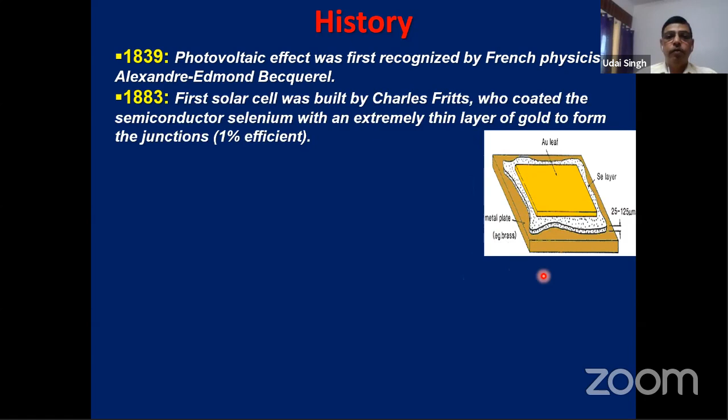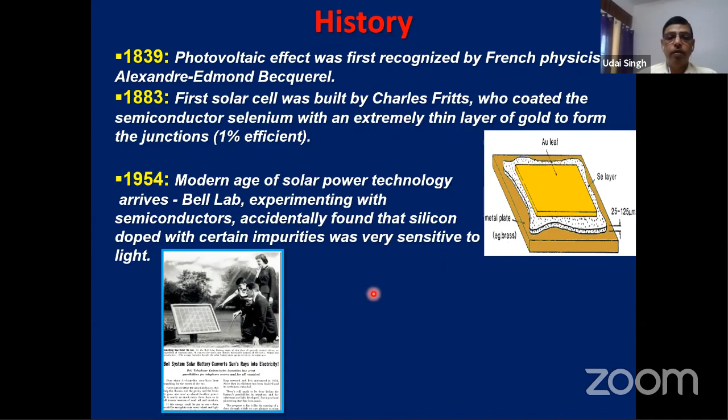In a brief history, in 1839 the photovoltaic effect was discovered by Becquerel. In 1883, the first solar cell was built, which was basically a selenium layer with gold leaf plated on top, giving an efficiency of around 1%. But the breakthrough came in 1954, the modern age of solar power technology, at Bell Labs. They showed that silicon doped with certain impurities was very sensitive to light. From there, silicon photovoltaics came into the picture.

So if you see the importance: direct conversion of solar radiation into electricity, no mechanical or moving parts, no noise, no pollution, and PV modules have a very long lifetime. Generally, the manufacturer gives around 25 to 30 years of lifetime for these modules, with a certain reduction in the efficiency.

The energy source, the sun, is free and inexhaustible. It's a very flexible energy source. You can use it in microwatt devices like your calculators, and megawatt plants are also installed.

So if somebody wants to make solar cells, what are the requirements? What do you look for in the materials? Semiconductor materials which generally have a band gap between 1.1 eV and 1.7 eV, because that takes care of the available solar spectrum. One needs a direct band gap structure for higher energy conversion, but silicon is an indirect band gap material, and still it is dominant in this field.

An easy, reproducible deposition technique suitable for large area production. If you are trying to go for this, it should be an easy and reproducible deposition technique, how you are going to make this, and then good photovoltaic conversion efficiency. One also looks for long-term stability. Otherwise, if the stability is not there, it's very difficult for people to go and buy it.

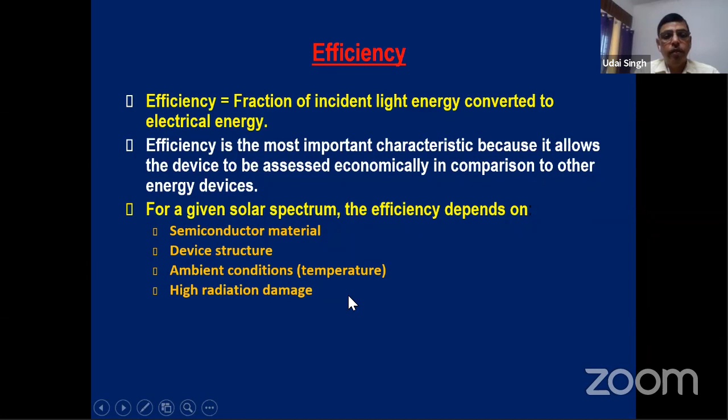Then the ambient conditions, under which conditions you are working. Then high radiation damage, if you are using the solar cell in space applications, so radiation damage is also a concern. And then the sun spectrum you are getting. Like in European countries, you don't get sunlight throughout the year.

So efficiency alone is not enough. The cost of the cells is also important, and the lifetime. So three parameters: efficiency, cost of the cell, and the lifetime, that is the stability.

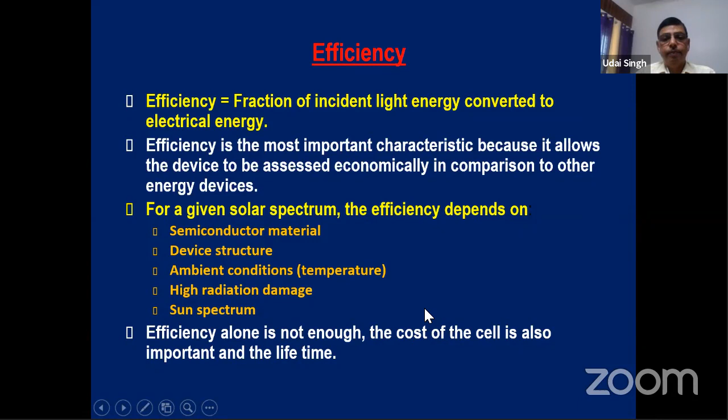If you look at the different approaches, there are many approaches to make PV cells, and experts do not agree on which one is best. If I work on silicon, I will say silicon is best. If somebody works on thin film, they say thin film is best and it's coming. And then there is concentrated photovoltaics. I will not be discussing this.

Our focus will be mostly on thin film, which comprises amorphous silicon. Then you have the polycrystalline materials, and there is a lot of work going on in organics, and recently a lot of work has been on perovskites.

So if you see the overview, the first generation was single crystal silicon wafers, and still silicon is dominant. More than 90% you are still getting from silicon. In the second generation came amorphous silicon, then polycrystalline silicon, then cadmium telluride solar cells, and then copper indium gallium diselenide solar cells.

In the third generation, one gets the nanocrystal solar cells, quantum dot cells, polymer solar cells, dye-sensitized solar cells, and the perovskites. They belong to the third generation. And now the fourth generation is hybrid inorganic crystals with a polymer matrix, and also tandems. People are going for tandem solar cells so they can capture the maximum solar spectrum. Because if you have a fixed band gap, you will only get that range of the solar spectrum. If you have a variable band gap, you can capture most of the solar spectrum in your device.

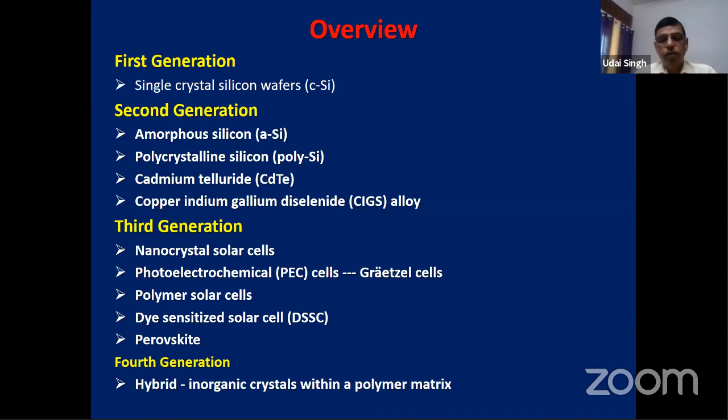So, as I told, I will just go briefly through silicon solar cells. Cells are typically made with crystalline silicon wafers, and these wafers are obtained from large cylindrical monocrystalline ingots. These ingots are grown by the Czochralski growth process, and directional solidification or casting produces large-grained polycrystalline ingots. If you go for polycrystalline, it reduces cost by around 40%, but the efficiency becomes less. So ingots can be either single crystal, monocrystalline, or multicrystalline. The most common approach is to process discrete cells on wafers sawn from the same. You saw it into different thicknesses.

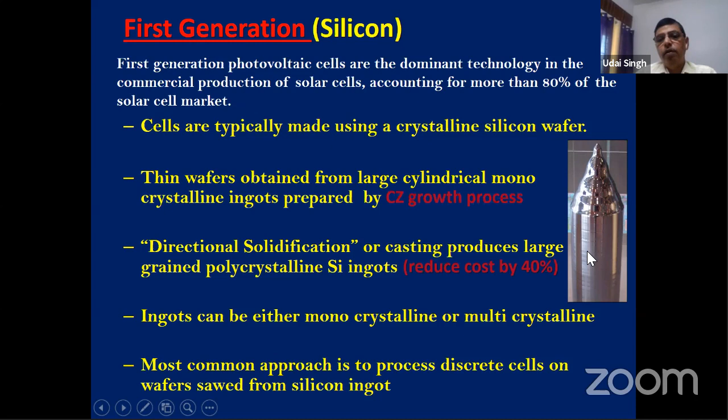So in brief, you start from the silicon feedstock, then you melt it in the Czochralski crystal pulling process. Then you get a big ingot, more than 6 or 7 feet. From there, you cut slices of wafers, you process them, and then you get a solar cell, and basically a solar module. In silicon, you have different silicon cells, and then you integrate them. Okay.

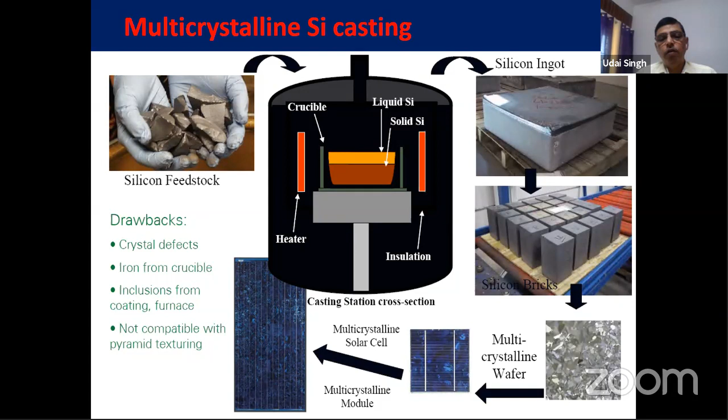Similarly, with polycrystalline, the material you grow will look different, like this. It's not a single crystal. Then you can have a polycrystalline module. This process is slightly cheaper, but efficiency is slightly reduced. So this is basically a brief on how silicon solar cells are processed, which you always see on rooftops; even on government buildings now, people are putting solar cells.

So why is crystalline silicon so successful? Because it has high module efficiency, around 20%. It has high stability and reliability. It's a mature and modular technology; it has been researched a lot. If you want to set up a plant, you can buy a ready-made plant and start production within 6 months. No environmental concern, and widely available material. This silicon you get from sand.

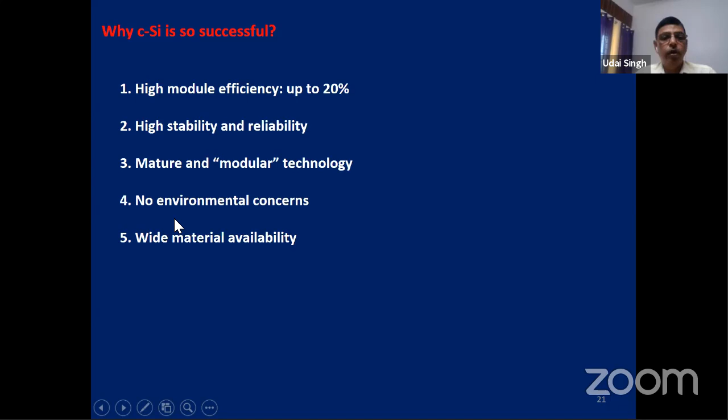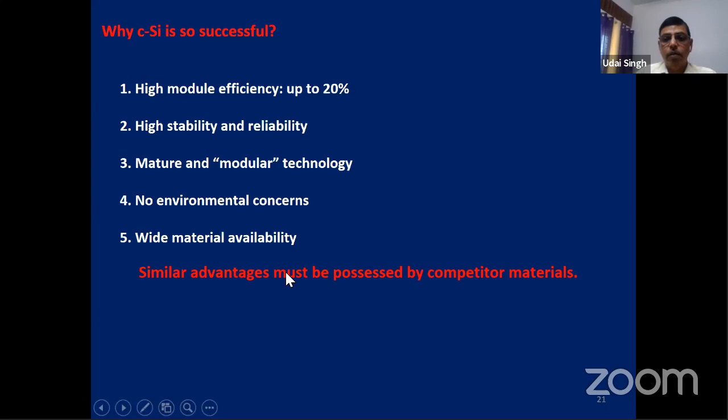So when you are looking for some other material, you have to look for similar advantages. Otherwise, it's not going to be as successful. The only weak point for silicon was that it is an indirect band gap, so the light absorption coefficient is slightly low, and the cost. But in the last 1 or 2 years, the cost has come down drastically.

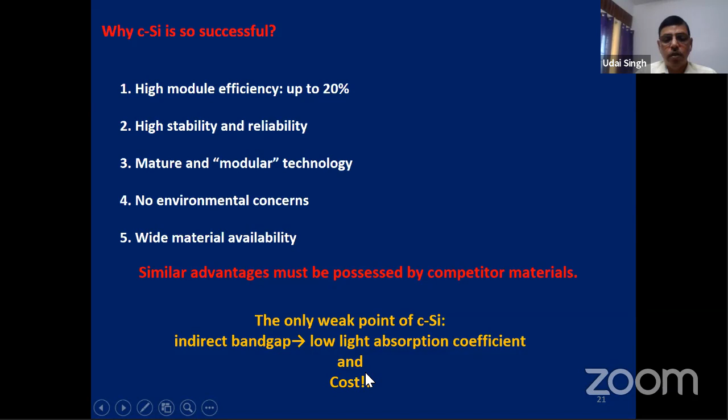So as I told, I will be discussing thin film. What are the advantages of thin film? If I go for thin film, it has to compete with the established crystalline silicon technology. One has to achieve comparable performance with the promise of substantially lower cost; only then can it compete with silicon. High production capacity with reduced material consumption and energy input in the fabrication process. Lower module cost for large area terrestrial applications.

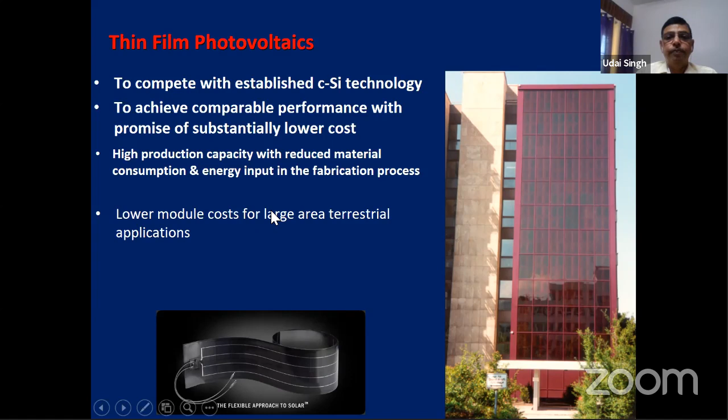Some of the advantages: in silicon, you have seen, layers of more than 100 micron are still needed, but for the thin film you need 1 micron to 5 micron thickness only. So low material cost is there. Continuous large area manufacturing is also possible. In silicon, you have different wafers and then you try to integrate the wafers in a module, but here you can have a continuous large area deposition.

And cell interconnects you can produce monolithically within the module. Flexible and lightweight modules can also be made. And these thin film modules are aesthetically superior, which gives the advantage for building-integrated applications. You can get it coated on the window panel also. Applicability in roll-to-roll production is also possible, and it has a potential in tandem applications.

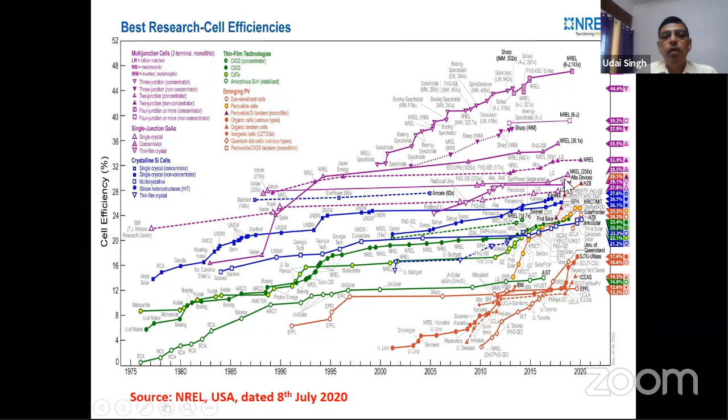This is from NREL, the National Renewable Energy Lab of USA; they update the highest efficiency of different solar cells. We are concentrating on the thin film photovoltaics. If you see CIGS, copper indium gallium selenide, at lab scale the maximum efficiency achieved is around 23.4%. Cadmium telluride is around 22.1%. Copper zinc tin selenide has reached a maximum of around 12.6%, so people are still working on that to get enhanced efficiency.

In the meantime, perovskite has come. Perovskite, you can see, is 25.2% on a small area. And if you are using tandem, meaning you grow perovskite on silicon, the efficiency increases to 29.1%. So on perovskite and CZTS people are still working.

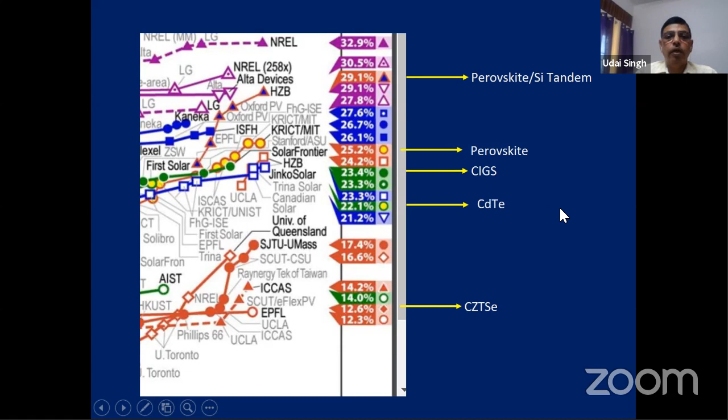As shown earlier, crystalline silicon needs more than 100 micron, whereas thin film needs only 1 to 5 micron. The main thin film technologies were amorphous silicon, which is now almost dead; no company is working on it now. Cadmium telluride, only First Solar is working on that. And then CIGS; I will show you the different companies working on copper indium gallium selenide.

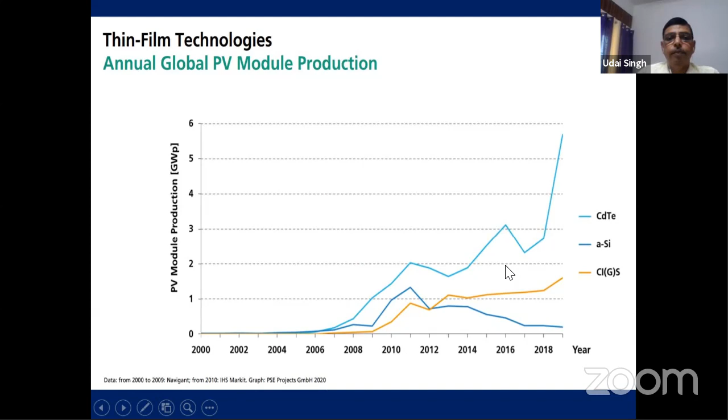In the annual global PV production, cadmium telluride is rising. CIGS is slow moving, but amorphous silicon is going down, so maybe by 2021, 2022 nobody is going to make amorphous silicon. Cadmium telluride and copper indium gallium selenide modules have the potential to reach cost-effective PV electricity, and they have transitioned from laboratory to the marketplace. The transition from lab to manufacturing has been much more difficult than anticipated.

Copper indium gallium selenide. Now there are different ways to manufacture this copper indium gallium diselenide. If you do it by sputtering, the highest achieved is 16.7. If you go by the co-evaporation method, recently it has been updated to 23.4, which is the highest.

Copper indium gallium selenide is a p-type material, so you have to make a PN junction. For the N side, mostly cadmium sulfide is used for making the PN junction. Because cadmium is slightly carcinogenic and toxic, Japanese people don't use cadmium, so it is cadmium free. Here also one has achieved 22%.

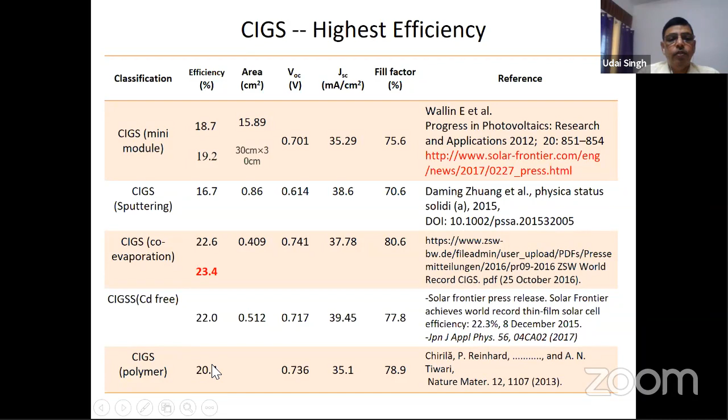You can also grow this on the polyimide substrate, a polymer. At lab scale, the highest efficiency achieved is 20.4. The module was 19.2, by Solar Frontier. If we compare with crystalline silicon, from 75 onward it is around more than 20%, small area. But CIGS started in 76 or 77, and now it has gone to more than 23%.

There are different process steps. Within this region, 95 to 2012-13, people were using the 3-stage process. I will discuss that. After that, people are trying to use alkali metal and then post-deposition treatment. So now this is the standard process, which is giving more than 22% efficiency at lab scale.

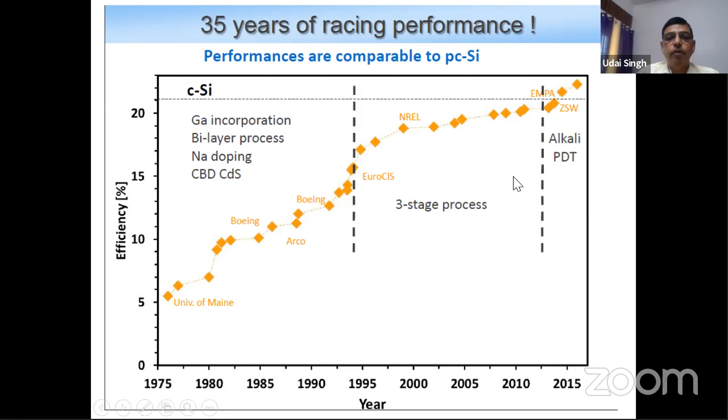So what is this material? It is basically copper indium diselenide. If you replace some of the indium by gallium, it becomes copper indium gallium selenide, so you can vary the band gap of the material. It's a compound semiconductor of group I, III and VI. It's a heterojunction. Silicon is a homojunction, because you take a p-type silicon wafer and diffuse n-type. But here copper indium gallium selenide is p-type, then you have a different n-type material, so the p-n junction is a heterojunction.

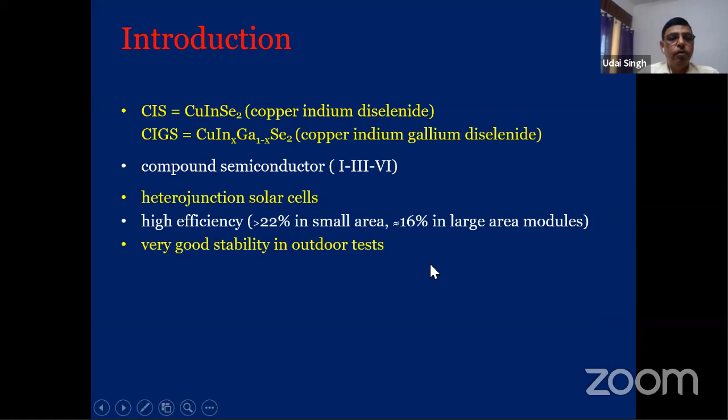High efficiency, more than 22% small area and 16% large area module. Very good stability in outdoor tests. For applications, you can use it in solar power plants, power supply in aerospace, and decentralized power supply.

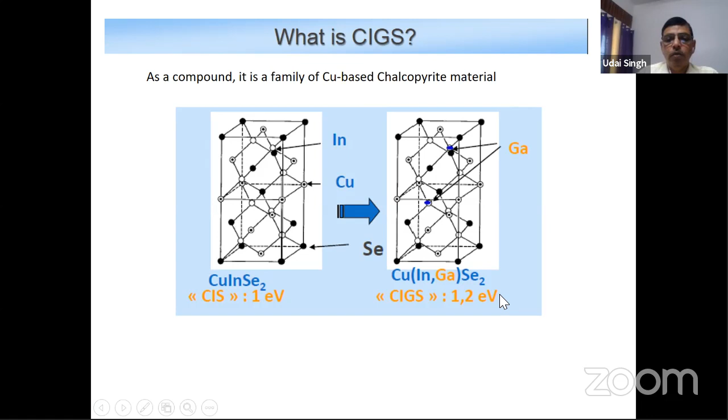The structure is basically the copper-based chalcopyrite material: copper, indium and selenide. If you replace some of the indium by gallium, you get copper indium gallium selenide. This is 1 electron volt, but you can go more than 1 electron volt. You can also replace selenium by sulfur to increase the band gap, but other problems come in. The best efficiency was achieved at around 1.2 electron volt.

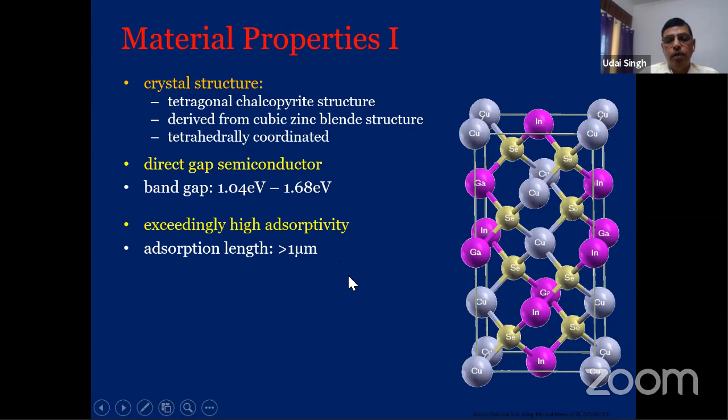The crystal structure is the chalcopyrite structure, derived from the cubic zinc blende structure, which is tetrahedrally coordinated. It's a direct band gap semiconductor. The band gap can vary from 1.04 to 1.68 electron volt by replacing indium by gallium. Copper gallium selenide is around 1.68; copper indium selenide is 1.04. The absorption coefficient is very high, so you can absorb most of the spectrum within 1 micron thickness.

The minority carrier lifetime is several nanoseconds. It's important because as soon as you generate a charge carrier, it has to be collected, so it depends on the carrier lifetime and the diffusion length of the charge carriers.

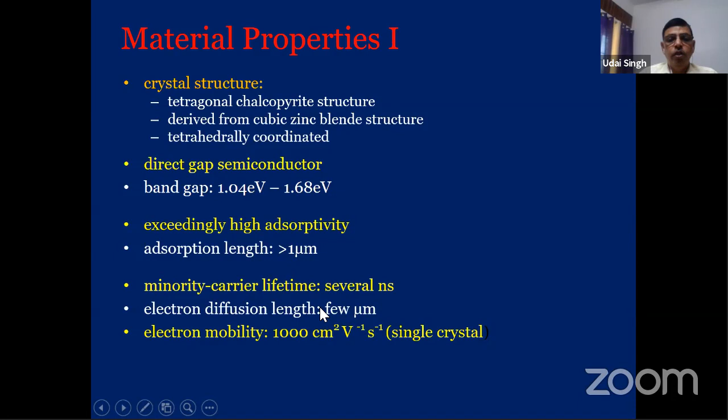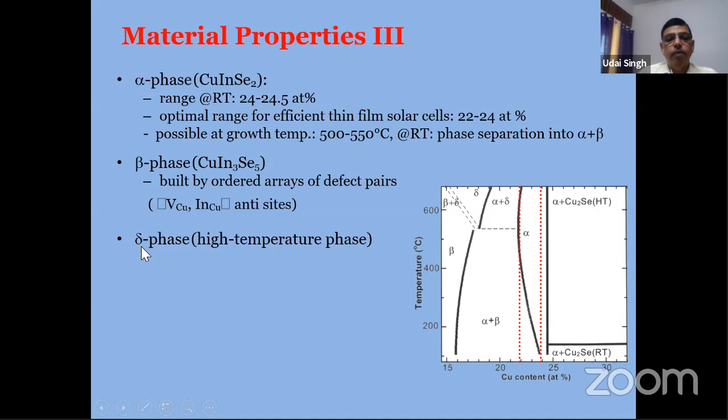Otherwise, you get the beta phase, certain vacancies, copper vacancies, indium replacing the copper, which is antisites. You get the delta phase also built by disordering copper indium. So these will create all the defect states into this. Now, if you are more than 25, you get the copper selenide phase, which is basically highly conducting material.

So the problem is that the alpha phase is highly narrowed at room temperature. So people have tried to see how we can increase this range. Partial replacement of indium by gallium has increased that range. In this case also, you can only replace 20-30% of indium. If you replace more of the indium by gallium, you are going to increase the band gap, but there are

certain defects again introduced. And people have also shown that sodium, around 0.1 atomic percent, if you put it into this, will also slightly increase this range. It will give a better morphology, passivation of grain boundaries. It will have a higher p-type conductivity and reduce defect concentration. I'm not going into detail how this works.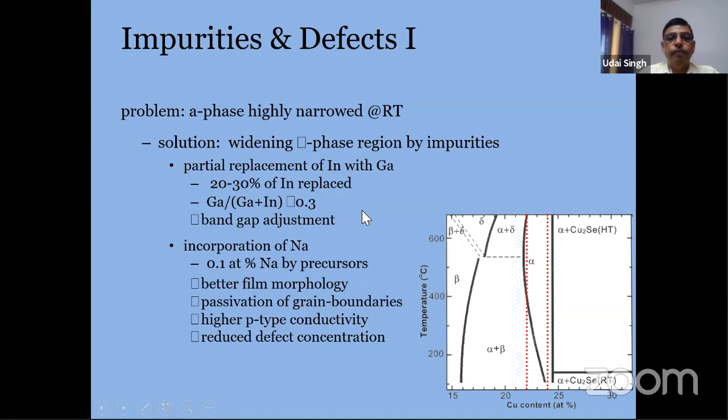So this shows how the band gap can vary from 1.04 to 1.68 if you are replacing indium by gallium. Okay. And this is just the quantum efficiency showing the different band gaps.

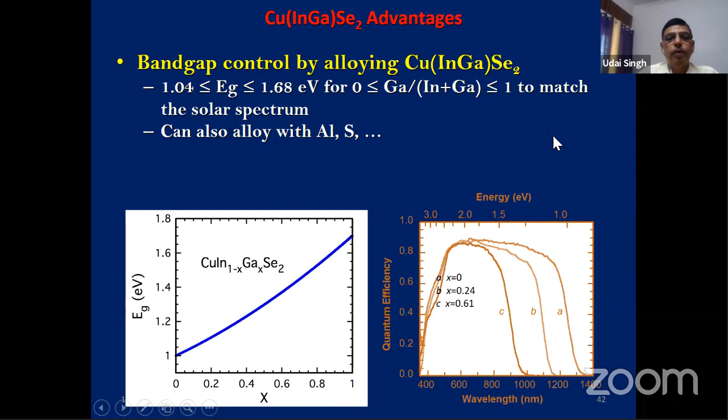Because it has a high optical absorption coefficient. If you see silicon, to absorb 100% light, you need more than 100 microns of the material. But in case of cadmium telluride or CIGS, with around 1 micron you are able to absorb most of the solar spectrum. So it is a very high absorption coefficient material because they are direct band gaps. Silicon is an indirect band gap. That is one of the differences; its optical absorption coefficient is slightly less.

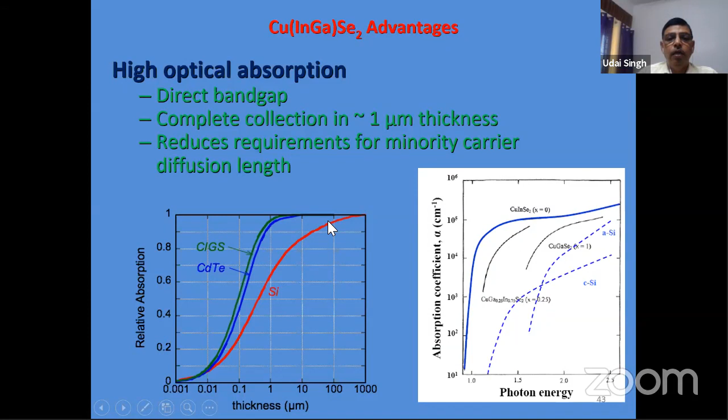So if you are going to make a typical device, you have a substrate, which can be a soda lime glass or a polyimide. On that, you have to coat a back contact, because with the PN junction you have to take a contact on both sides. One is referred to as the back contact, the other is the front contact. Molybdenum is used, which one can deposit by sputtering. Then you have a p-type copper indium gallium selenide, also referred to as the absorber layer because it absorbs most of the light. Then you have an n-type material, commonly cadmium sulfide.

It's a thin layer. Then you have a transparent conducting oxide, because light has to pass. It should be conducting also, and light has to pass, so there is a trade-off when making a transparent conducting oxide, which is also used in your mobile smartphones, where you tap and see the numbers. So it should be transparent and conducting. If you use a direct metal, no light will be absorbed, all will be reflected back. So a transparent conducting oxide is used, and for a larger area, you put a certain grid so you can collect the current from all over the area.

So the solar spectrum is coming this way. The TCO is a higher band gap, maybe around 3.3, so most of the light will pass. Cadmium sulfide is around 2.4. Still some light will be absorbed, but most of it will pass and go into the absorber layer. This just shows the band gaps, like 1.2 electron volt, 3.3, 2.4, 1.2. So I'll not be focusing more on this.

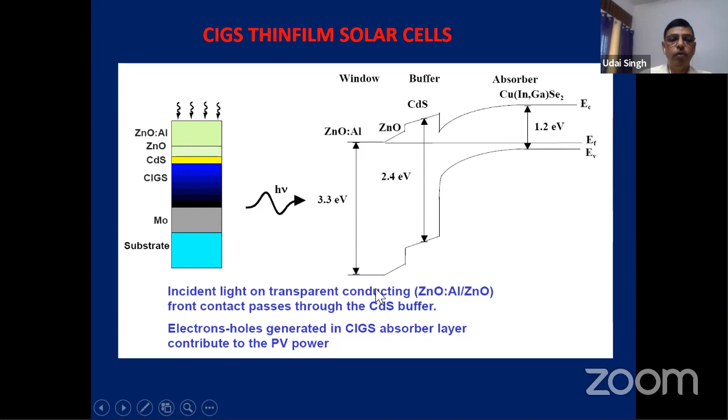Skip this. So if you see the processing steps, the back contact is mostly done by the sputtering technique. Then you have the absorber deposition, copper indium gallium selenide. You can do it by co-evaporation, which means you evaporate all four materials simultaneously. Another method is sputtering plus selenization: you sputter the copper, indium, gallium, and then selenize it in selenium.

There are also non-vacuum processes, where you can use nanoparticles and print them, or electrodeposition, and then again selenize it. So there are different processes used, but those going into industry mostly use co-evaporation and sputtering plus selenization.

Then you go for the N-type material, which is generally referred to as the buffer layer. Cadmium sulfide is mostly used, and the Japanese use zinc hydroxide or indium hydroxide compounds; they don't want to use cadmium. On top of this, you have ITO, indium tin oxide, and/or aluminum-doped zinc oxide as a transparent conducting oxide, again deposited by sputtering, and then you can manufacture this. So this is the simple step one can process through.

So in this case, I will try to go through the different layers: if you are trying to have a moly, why do you want to have a moly? What are the different processes here, and then cadmium sulfide, how it can be deposited.

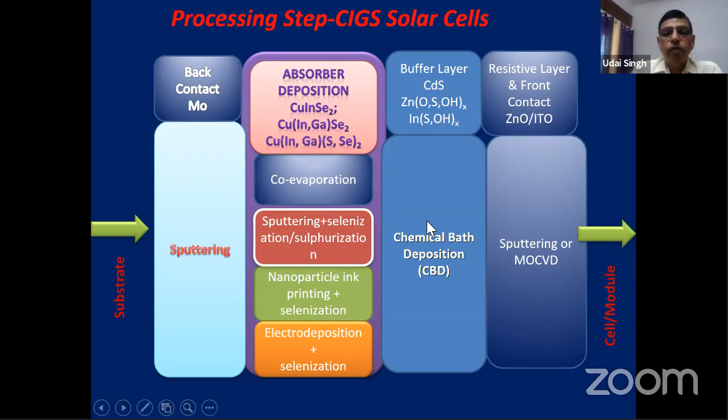So back contact. First, what is the requirement? It should be chemically stable in the selenium atmosphere, because you're trying to selenize it. It should give a good ohmic contact; if it's not a good ohmic contact, it's highly resistive. And then the adhesion and the structure. Adhesion is very important, because it should not happen that after a few days the film comes off. So adhesion is also a very big parameter.

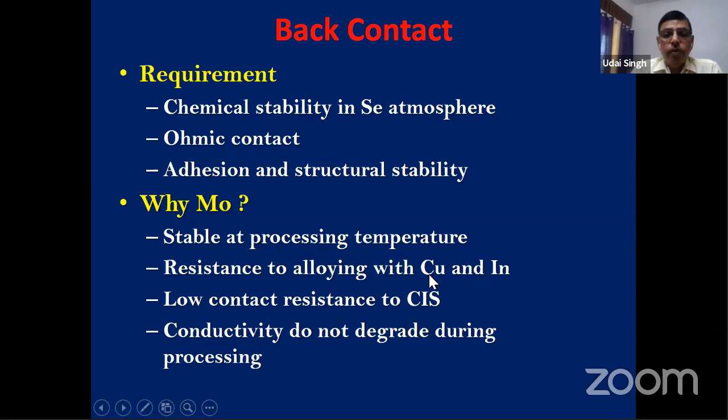So why moly? Why is only molybdenum used? During different research, people have come to the conclusion that it is stable at the processing temperature, resistant to alloying with copper and indium, gives a low contact resistance to copper indium selenide, and its conductivity does not degrade during the processing steps.

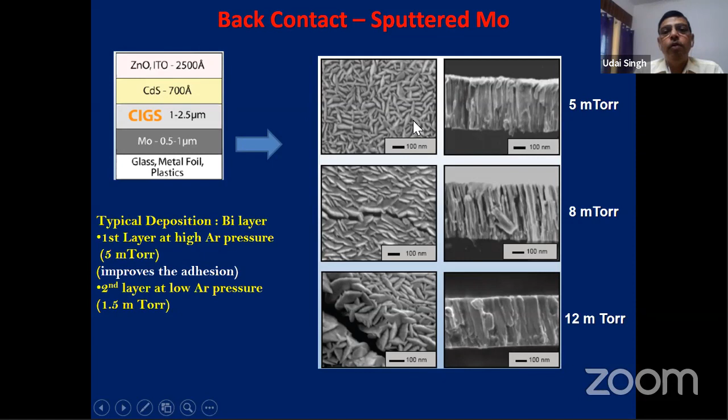So one can deposit generally a bilayer. Typical deposition is a bilayer. Why is a bilayer used? Generally they deposit the first layer at high argon pressure and the second layer at low argon pressure, to reduce the stress in the film. If you have a large stress in the film, maybe it will peel off the substrate after a certain time. Deposition is generally done by DC magnetron sputtering, 2 to 4 passes over the target: high power, low argon pressure, and low power, high argon pressure. One will give you compressive stress, the other tensile stress. So you reduce the stress in the film, and your adhesion will be much better.

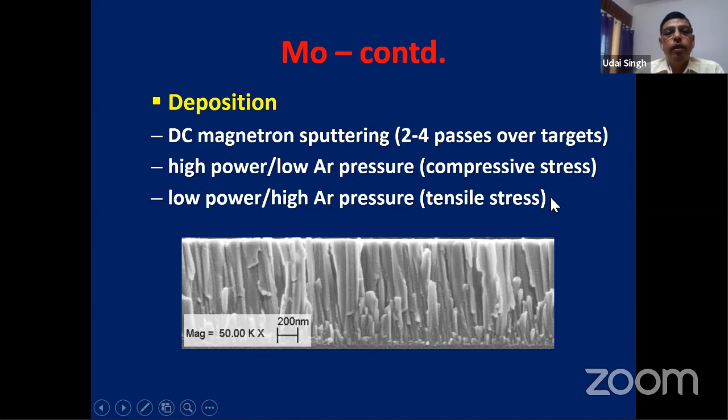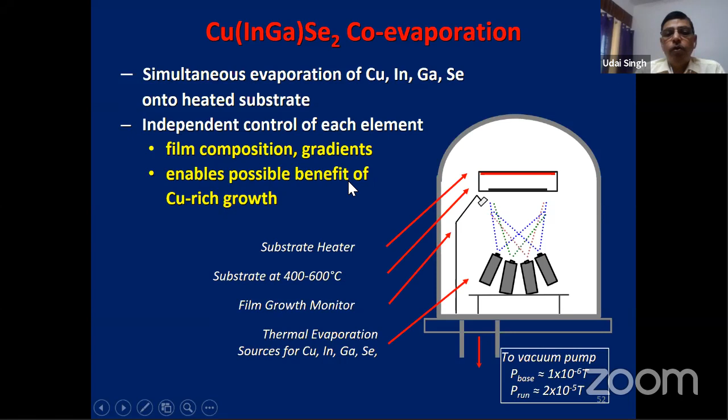Now, if you are using co-evaporation, there are 4 sources for the 4 different materials. It's thermal evaporation. You have a film growth monitor, so you can monitor the rate. The substrate you can keep here, and on top of that you can have a substrate heater, which can work at 400, 500, whatever is required. So you have independent control of each element, film composition, gradients, and it enables the possible benefit of copper-rich growth. So you can vary these different parameters.

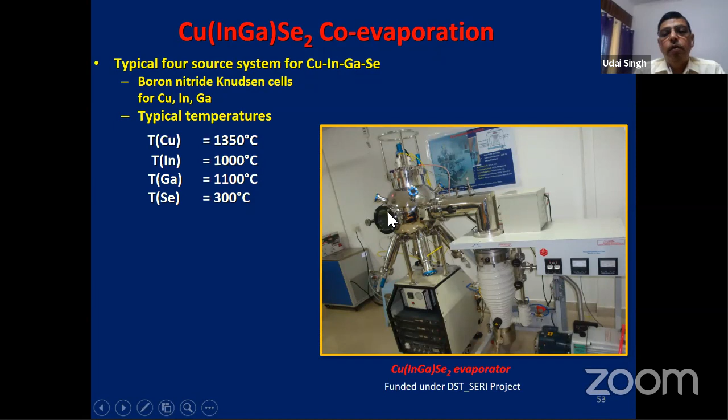This is one of the systems which we have in our lab here in KIIT Bhubaneswar. These are basically the 4 sources you can see. You can have one material here, one here, one here, and one here. All these are the power supplies for each source, so you can simultaneously deposit. This is funded by DST SERI.

So in co-evaporation, different variations one can have. Initially, the substrate temperature is constant, selenium is constant, and you are depositing copper, indium, gallium at constant rates. So you get a band gap with no grading.

After that, there was the bilayer or Boeing process, because the Boeing company developed this process. You have the selenium flow constant, but initially the substrate temperature is lower, and you have more copper and less indium gallium. After that, you raise the substrate temperature to 550, reduce the copper, increase the indium gallium, and finally reduce it. So you get a normal grading structure, which was the Boeing process.

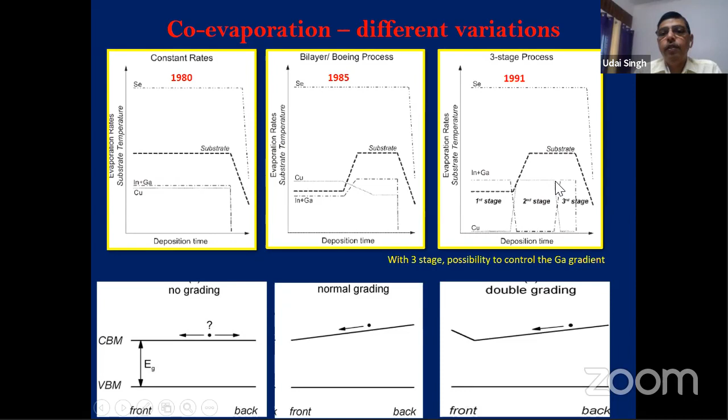But in 1991, NREL in the US discovered a 3-stage process. They have the selenium flow constant. Here the temperature is lower and there is no copper; initially they deposit only indium gallium. After a certain time, they increase the substrate temperature and the copper, whereas they reduce the indium and gallium. In the 3rd stage, they again raise the indium gallium and reduce the copper to 0. That's how they get a double grading structure, with the possibility to control the gallium gradient. This has given the best structure, the best device.

Other method is the sputtering and selenization. So it's a sequential process, because you selenize from vapor. So you take the substrate, you deposit copper, indium, gallium by sputtering, and then you try to selenize with hydrogen selenide or selenium vapor. So large area deposition. Only disadvantage is hydrogen selenide is very toxic gas.

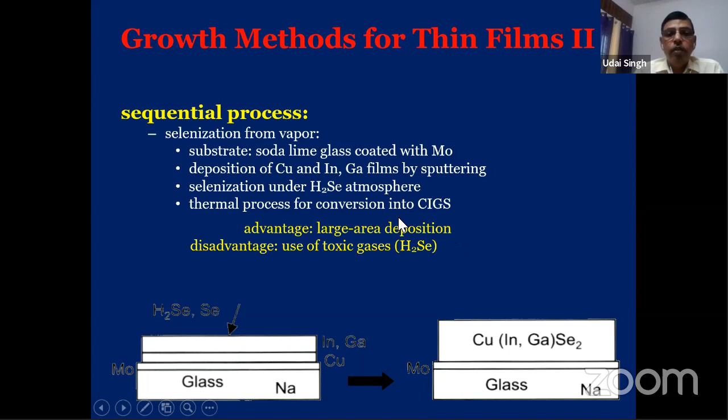So these 2 methods are more familiar. But if you see this non-vacuum process, people have thought you can control the composition very well, improved material utilization. In sputtering, if you are using a sputtering target, only 40% is used, 60% is lost. If you have a manufacturing unit, you can have a contract with the supplier, where you can give the target again and then buy back. But at lab scale, it's all disadvantage, because only 40% is used, 60% is waste.

So people have found that if you use a non-vacuum process, you have improved material utilization, improved uniformity, and reduced process cost. This approach has been used by 2 US companies, but efficiency wise, small area is okay, but large area production was not given. Commercialization wise, it's not good.

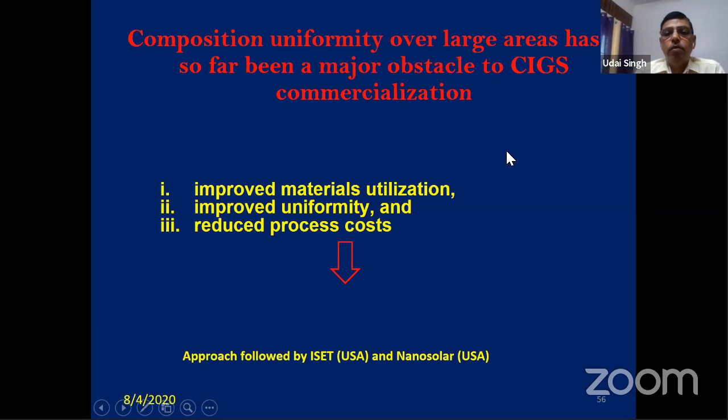Now coming to the N-type material, cadmium sulfide, which is generally deposited by chemical bath deposition. A simple setup where you have a water bath in which you keep a beaker. There is a coated magnet which is rotating, and you dip your substrate. For the solution, one is the cadmium source, cadmium sulfate. Then you can use ammonia and the sulfur source.

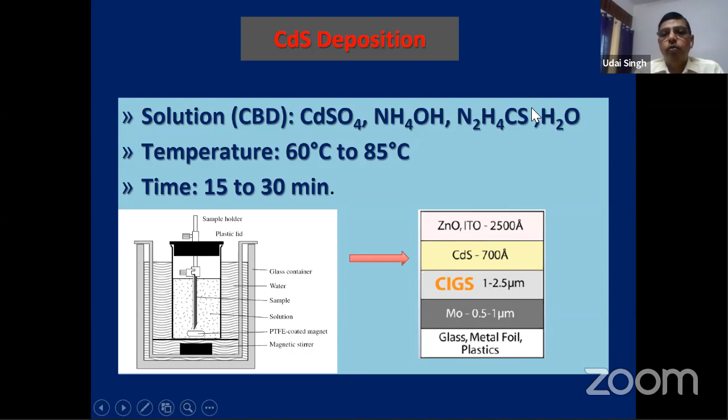After that, before the transparent conducting oxide, people have tried to use one layer of highly resistive intrinsic layer. What happens if you don't use this highly resistive intrinsic layer? When you're depositing, there may be chances you have some pinholes, some defects. So when you deposit the contact, there may be some shunting path. It may not be visible when you are measuring now. Maybe after 1 week when you measure, it may have shorted.

So what they have tried to do is coat this with a highly resistive N-type zinc oxide. So it will avoid the shunting path. So you can see, if your intrinsic zinc oxide thickness is 70 nanometer, you get a good fill factor. But if you increase this thickness, your fill factor will reduce.

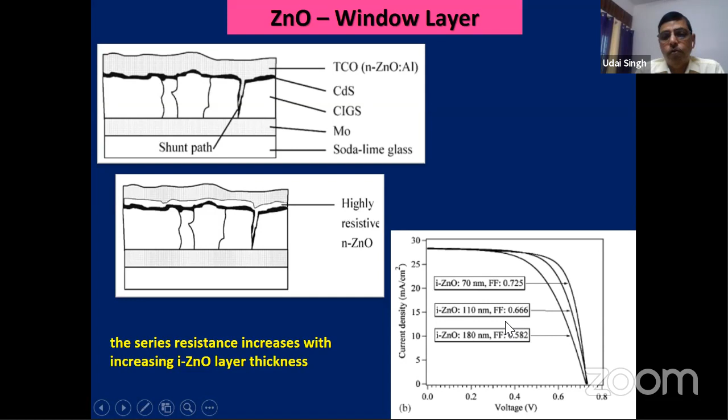And then the transparent conducting oxide is mostly zinc oxide, aluminum doped zinc oxide. The second layer is aluminum or boron doped, 350 to 500 nanometer. Thickness and material property are determined by the trade-off between transparency and conductivity, as I told you earlier. Because if you want more conductivity, your transparency will reduce. So there is a certain trade-off. You have to optimize between 80 to 90% transparency and conductivity of a certain range.

And finally, if you are trying to have a large area, you put certain metal contacts so that you can collect the current from all over the area. At lab scale, we try to make small cells for the measurement.

And if you are having a module, you can integrate that module by laser scribing. You start with the glass substrate, then you scribe it, you isolate the moly, then you deposit the copper indium gallium selenide and high resistive zinc oxide. After that, you have the second scribing isolation, and then finally you coat this, then you have the different cells. So here interconnects are possible on the large area, but in silicon, you have to have different solar cells and then integrate. This is one of the devices we have developed under the DRDO project, around 11.1%.

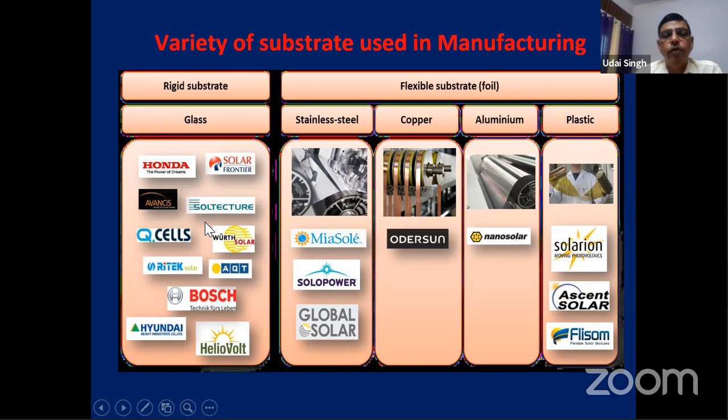Now this gives you the substrate-wise view. Glass, so this many companies are working on glass. Most of the companies have merged or they have stopped. Then one can have stainless steel substrate, MiaSolé, Global Solar, and copper or aluminum sheet or plastic. So these are the different companies which are working on different materials of the solar cells.

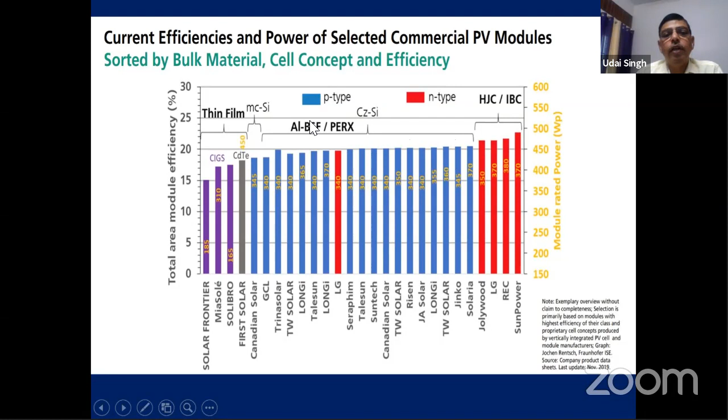But recently, what you see, this is updated 2019 November. So you can see Solar Frontier on copper indium gallium selenide is making something, and then MiaSolé, and the cadmium, and then Solibro. Three companies are in manufacturing. Most of them have merged or they have sold out. And for cadmium telluride, you have First Solar. Most of these companies are on silicon solar cells, with different types of methods they've used for crystalline silicon.

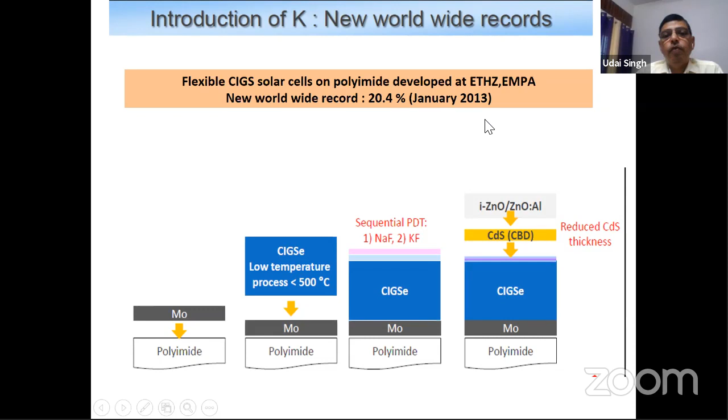So I will skip this sodium, which was not necessary. So what you have seen, this is basically the processing step for the polyimide. In the polyimide, you coat the moly, then the CIGS, because the polyimide material cannot go to higher temperature, more than 500 degrees. So you have to have low substrate temperature. Then they deposit the potassium fluoride or the sodium fluoride, and then they do the post-deposition treatment. So they have got around 20.4 in 2013. Now they are also in module production.

So this is now the standard after 2016. You have a glass or metal or plastic foil, and then you have molybdenum as a back contact. Then moly selenide generally is formed between the copper indium gallium selenide and the moly during the process. So you have copper indium gallium selenide, which is around 2 micron. Then you deposit some alkali metals. Then you have the cadmium sulfide, then intrinsic zinc oxide, and then the top transparent contact. So this is the standard that is now being used.

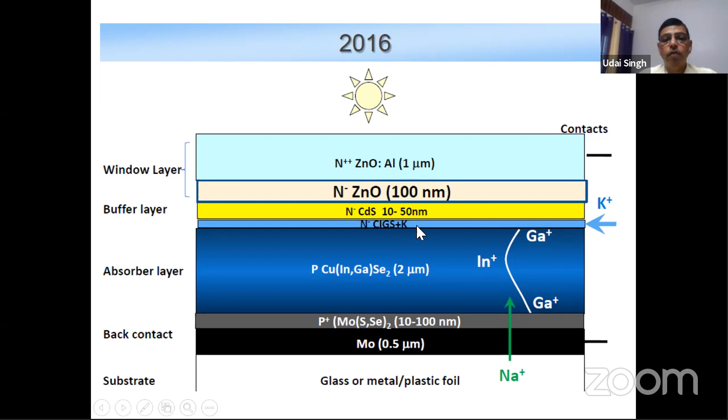But still people are trying other materials to enhance the efficiency, but there has not been much success on that. But lastly, in 2016, they had success depositing the alkali metal and then trying to anneal. So advantages of these flexibles are low weight, adaptation to non-planar surfaces, new applications, and roll-to-roll processing is also possible, because if you use the glass substrate, roll-to-roll processing is not possible. Potential for reduced energy payback time. Energy payback time is how much energy you have used to create the solar cell and within how many years or months you can recover that much energy. Okay, so silicon has an energy payback time more than copper indium gallium diselenide.

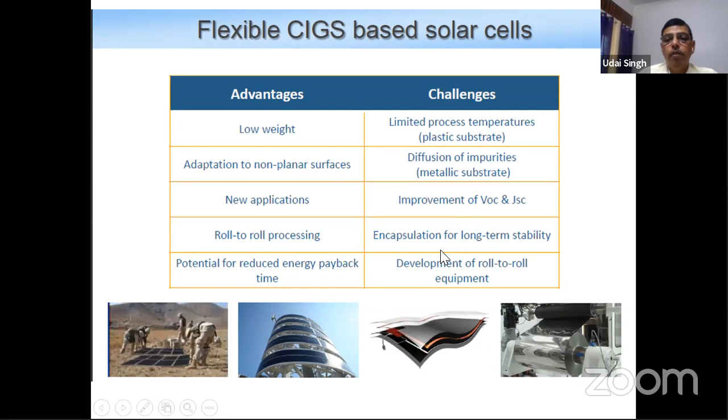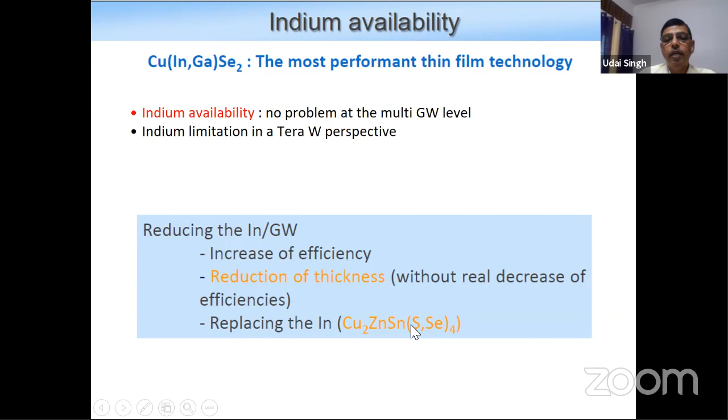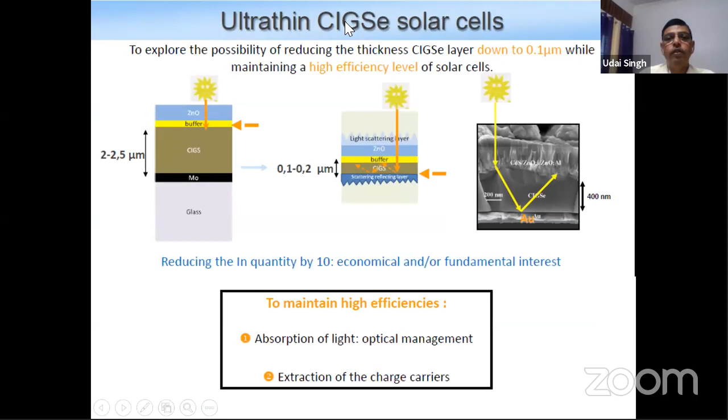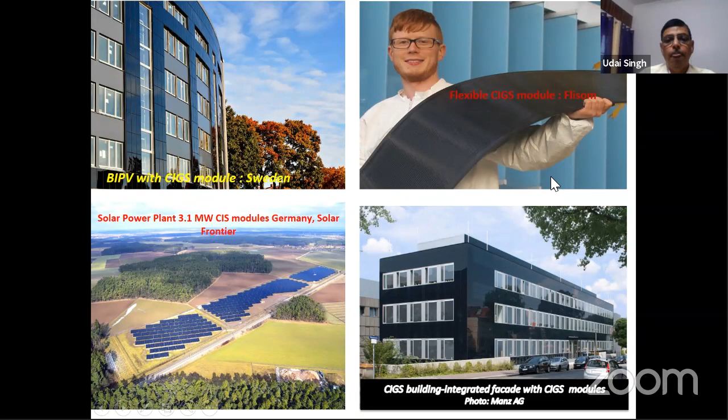Now this CZTS, kesterite, is used if you are trying to replace indium. Again it's a direct band gap material, copper zinc tin selenide or copper zinc tin sulfide. You can vary the band gap from 1 to 1.5 electron volts. This also has a high absorption coefficient. It's again a p-type semiconductor. Zinc is abundant, tin is also abundant in earth, so they are earth abundant materials.

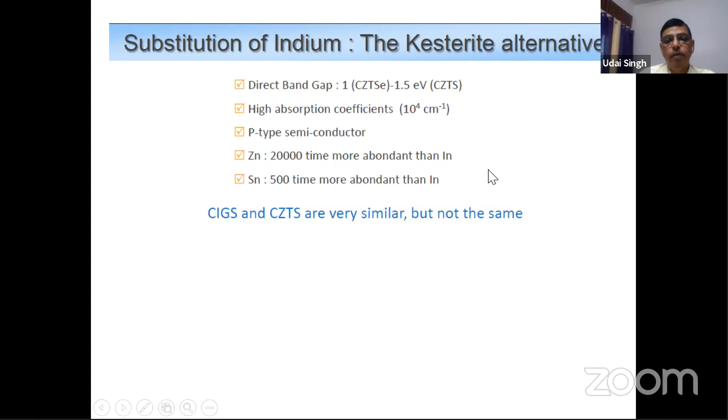So what are the limitations for this? One has to have a deep knowledge because a lot of research has to be done: processes better suited for kesterites, better contact materials. And then there is the problem that different secondary phases are formed in this material. Structure wise, again, it's the same. You deposit on the glass, then you have the back contact, then the absorber layer, and on top of this you again have the cadmium sulfide.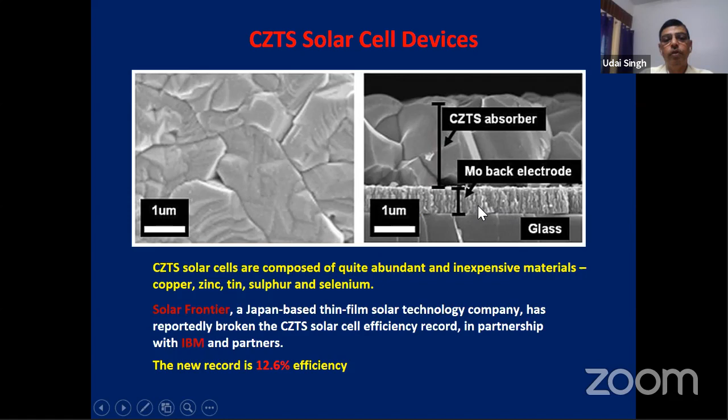Efficiency wise, only 12.6% at the lab scale, and that was achieved in 2014. From 2014 to 2020, 6 years have passed, and nobody has crossed this limit. A lot of work is going on, but this efficiency has not been improved. So there are three variants. One is copper zinc tin sulfide. People are using different methods: sputtering, electrodeposition, solution-based, co-evaporation. Using these methods, the highest efficiency achieved is around 9.24%, which is again way back in 2015.

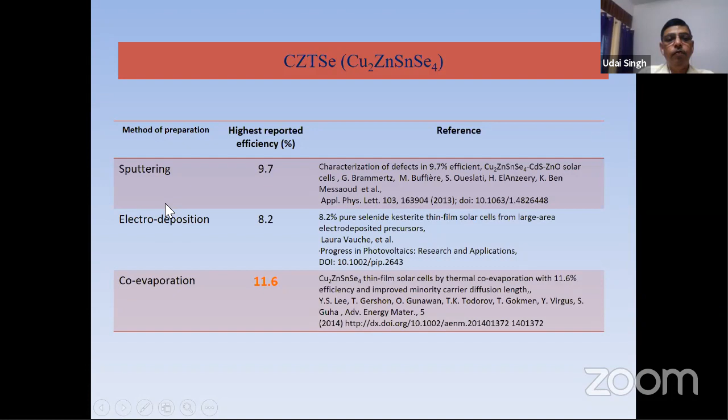For the variant copper zinc tin selenide, using different methods, the highest efficiency achieved is only 11.6%, which has been improved to 11.7%, not much. And for copper zinc tin sulfur selenium, the highest efficiency is 12.6%, achieved in 2014 only on a small area. In the last 6 years this has not been improved. People are struggling, getting around 9 to 10% only on small areas, so there is no possibility of any module manufacturing either.

Even the Indian government has funded a lot of money into this. A lot of projects have been sanctioned on copper zinc tin selenide from the Ministry of New and Renewable Energy, even from the DST. We have also run one project on this. Still a lot of problems are there with this material. It's a p-type semiconductor, same structure as we have seen in CIGS; only indium and gallium are replaced by tin and zinc.

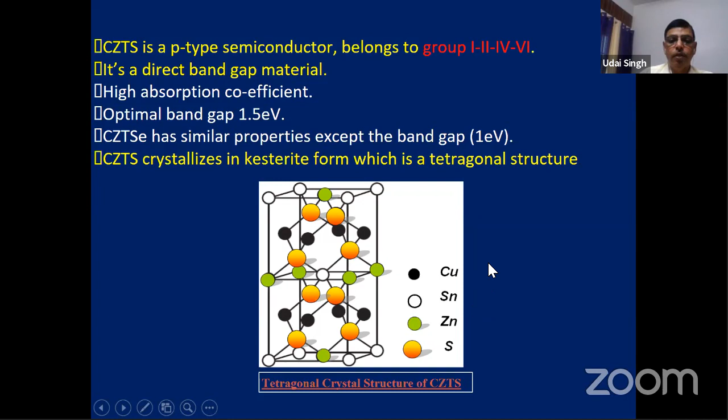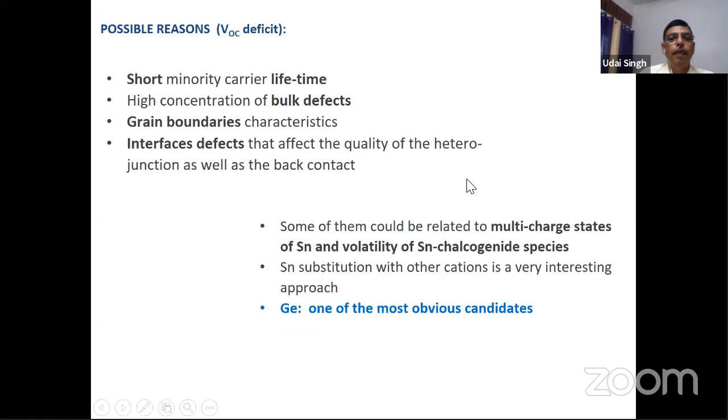Structure wise also the same. You have the soda lime glass or polyimide substrate, then you deposit molybdenum as a back contact, then the absorber layer of copper zinc tin sulfide or selenide, then cadmium sulfide to make a PN junction, then intrinsic zinc oxide and aluminum doped zinc oxide. The only problem is they have a large number of secondary phases and defect states, which kill the efficiency. I will just skip this; people have tried to replace some with germanium. So CZTS is a new emerging technology, but still a long way to go.

Now coming to the third material, which is cadmium telluride. I will briefly go through cadmium telluride. I think I still have 8 to 10 minutes, so I will try to finish within time.

This is the most successful thin film solar technology in production. First Solar is the company, though it had a bumpy ride: earlier it was Ametek, then Golden Photon, then British Petroleum, then General Electric, and finally Solar Cells, which is now referred to as First Solar. Many companies started on cadmium telluride. They all have closed. Only First Solar is surviving, with manufacturing plants in the US and in Malaysia.

One of the advantages people found is that treating cadmium telluride with cadmium chloride improves the efficiency, because it acts as a flux agent and gives grain growth. That was a breakthrough in this technology. Now around 22.1% on 0.48 square centimeters is the highest efficiency achieved. Module wise, they are around 17 to 18%, but in regular production they may be around 14 to 15%.

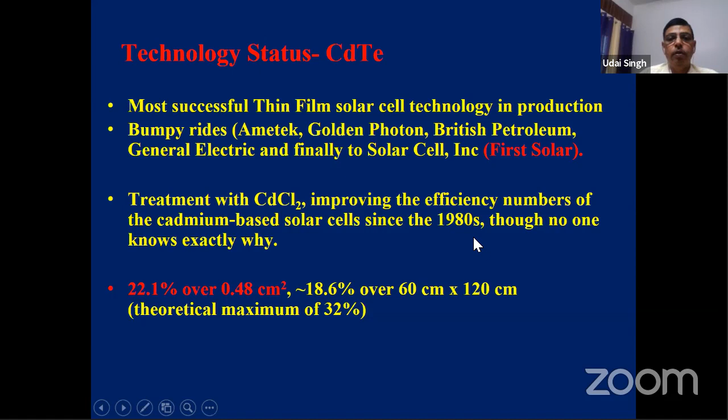Again, we know that the ideal band gap is 1.4 electron volts. Cadmium telluride has 1.44, nearly 1.5. So again, a direct band gap semiconductor. It requires only 2 micron thickness, and only 2 materials are used: cadmium and tellurium.

In CIGS, copper indium gallium selenide, or copper zinc tin selenide, they have 4 materials. So controlling the composition is a difficult task in those materials. Composition control is one of the major challenges there. But here, with only 2 materials, the control is quite good. Cheap to produce, less energy needed to produce, and easy fabrication.

The only problem with cadmium telluride is the ohmic contact. The work function is very high, 5.8. So generally you don't find any suitable metal for forming an ohmic contact. That is the biggest problem. But still, people try certain other methods and then try to coat the metal on this.

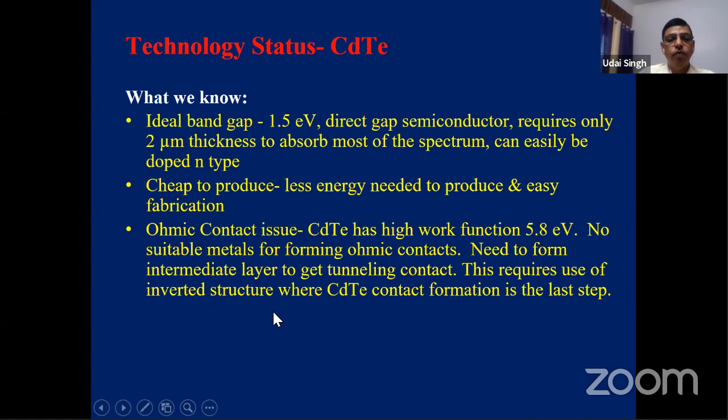So you need to form an intermediate layer to get a tunneling contact. You don't directly deposit metal on the cadmium telluride. You try to have some interlayer between them. So this requires use of an inverted structure, where CdTe contact formation is the last step.

So for cell formation, again you start with the substrate. Common soda lime glass is used. Then on the soda lime glass, you have a transparent conducting oxide, which is fluorine doped tin oxide. It can be deposited by different methods. On top of that, you deposit the window layer, which is cadmium sulfide.

Again, it can be deposited by different methods: spraying, sputtering, chemical bath deposition, electrodeposition. CSS is closed space sublimation. First Solar is using closed space sublimation. Then you have the absorber layer. It can also be sprayed. People are now using sputtering or CSS. First Solar is using the closed space sublimation process, and that's the only company which is surviving.

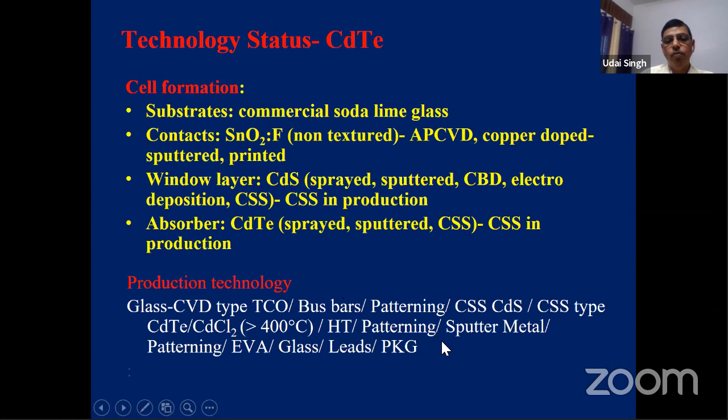So the production technology: you have glass, then the TCO, then bus bars, then patterning. These are the steps to get the final module. Structure-wise, you have a glass, a transparent conducting oxide, a buffer layer, and then the cadmium telluride. At the cadmium sulfide and cadmium telluride interface, due to intermixing, some interface is formed, and then the back contact. People have tried copper. So light goes this way.

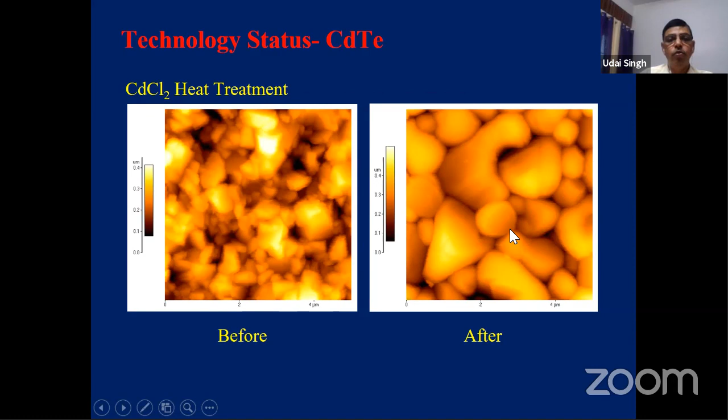One of the advantages here was that earlier, when you deposited the cadmium telluride, you had this structure. But people found that when you treat it with cadmium chloride, you get very large grains. That was the achievement in the 80s. Now this is the common process used. Now we can have a substrate structure also.

So further improvement is still needed. Cadmium telluride has not reached its maximum efficiency. Performance so far has resulted from the increase in the short circuit current. So there is still room to improve the open circuit voltage by 15%, because the band gap is around 1.5 electron volts, so the maximum open circuit voltage one can achieve is around 1 volt, but still only 750 or 850 millivolts is achieved.